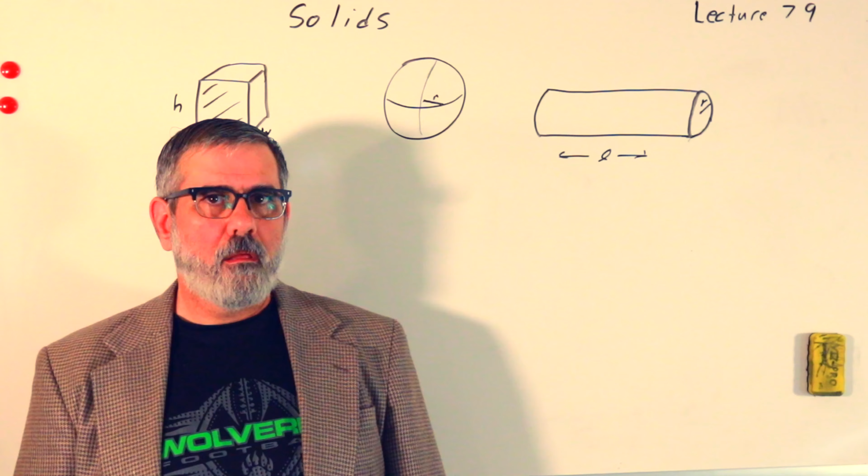Lecture 79. This lecture is on solids, so we're going to transition into talking about solids, liquids, and gases, and how we treat them in physics. We'll also put some thermodynamics in here as well, so it'll be kind of our first contact with thermodynamics.

But today we're going to talk about solids. Just keep in mind, you know the formal definitions of these things, right? Solids retain their shape. Liquids maintain the shape of the container in which they're contained. And gases tend to diffuse in every direction, so they're hard to contain. You can only contain them in an enclosed volume, and they will fill that uniformly, okay?

But what's the difference between, say, a solid and a liquid? Well, think about glass, right? Glass is kind of like a liquid. It's always kind of flowing. If we were to have some glass windows and wait a few hundred years, you'd see the glass would pile up towards the bottom because it's always flowing. It's in a flowing state.

If you think of the rocks in the Earth's mantle, where it's very hot and high pressure, these rocks behave like liquid over time. Granite, for example, which is what the continents sit on, is buoyant in the rock substrate in which it sits. It has a lower density, so it's kind of buoyed up in comparison to, I forget, what the ocean floor is made of. It slips my mind, I'm not a geologist. But anyways, so there's kind of...

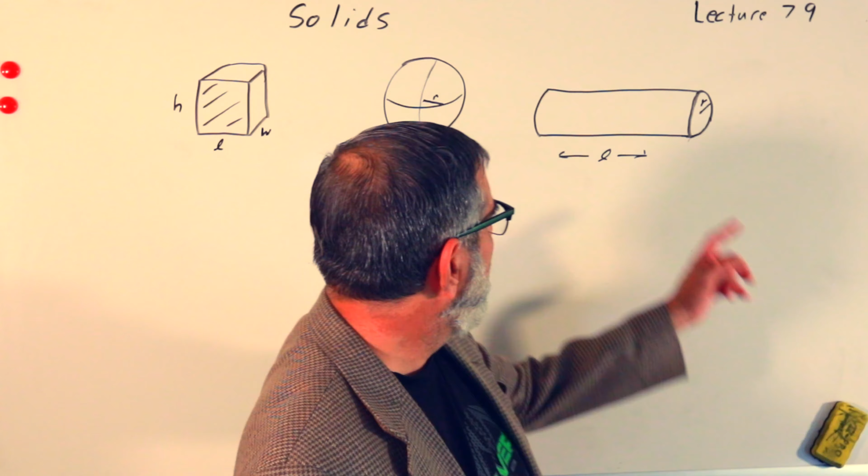But we're going to focus on solids, so we have to begin with some general metrics for solids. Here are a few different shaped solids. Solids have shapes—they can have any shape, but some common ones are cube-like shapes, sphere-like shapes, and cylinder-like shapes. As we work with this stuff today, we're going to need some formulas, like for volume.

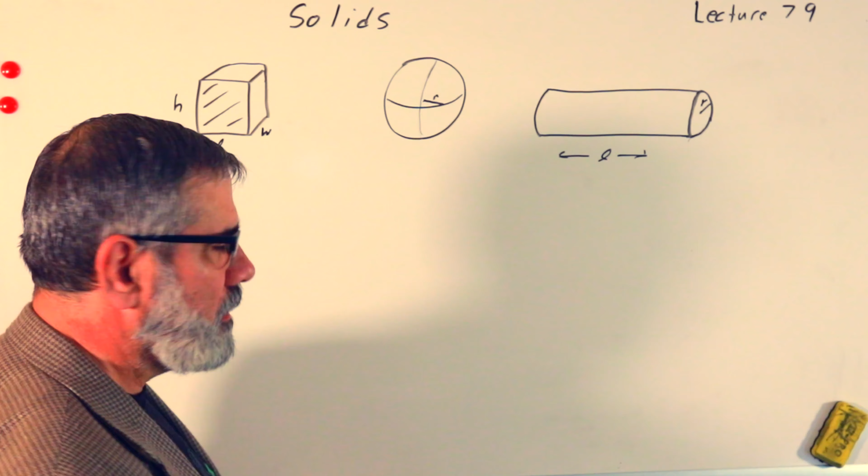So what's the volume of a cube? If this is the length, this is the width, and this is the height, what is the volume formula for a cube? Or what do they call it—I don't remember what they call the three-dimensional rectangle version. Rhomboid? I don't remember. But anyways, who knows the volume formula for this?

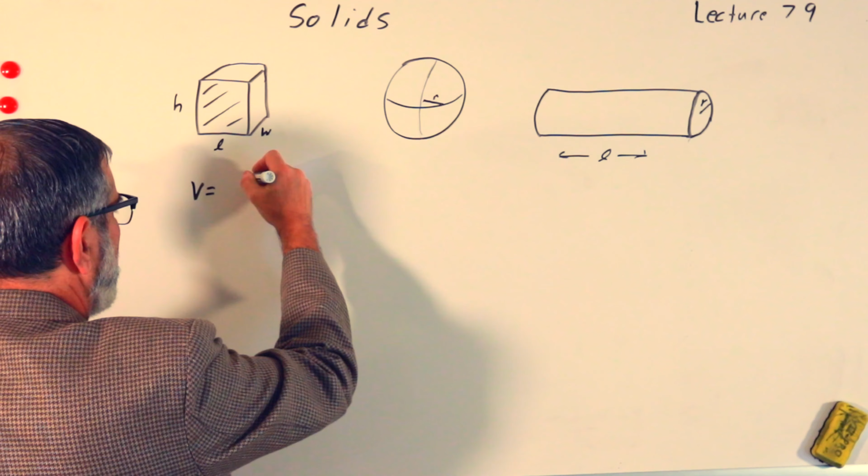H times L times W? Yeah, of course, it's exactly the product of these three dimensions—length times height times width. If it really was a cube and all three were the same length, you'd say it was L cubed.

But look at the face of the cube—that's an area. If we slice this cube, it's called a cross section. If you cut the cube so you have a face like that, its cross section is this square or rectangular cross section. So the cross-sectional area, CR for cross-section, in this case equals the height times the length.

What about this one? This is a sphere. What's the volume of a sphere? The formula pi r squared is actually the area. It turns out the volume of a sphere is 4/3 pi r cubed. It's trivial if you have calculus—you can integrate—but if you don't, I think it's best just to memorize.

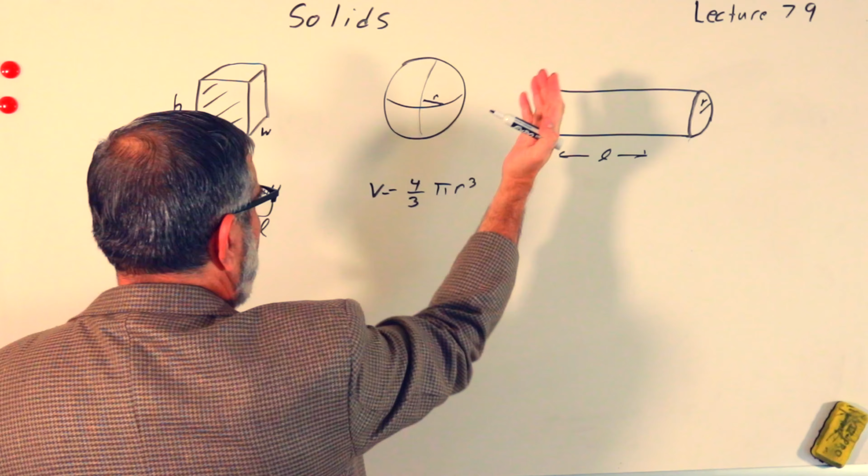I have to think about whether there's a non-calculus way to do it—there probably is. If I slice it right down the center, through the center point of the sphere, we get a cross-sectional area equal to pi r squared. If I don't slice through the center, the radius will be less—imagine slicing right at the edge, it's a much smaller radius. This distance here would be the radius of the cross section.

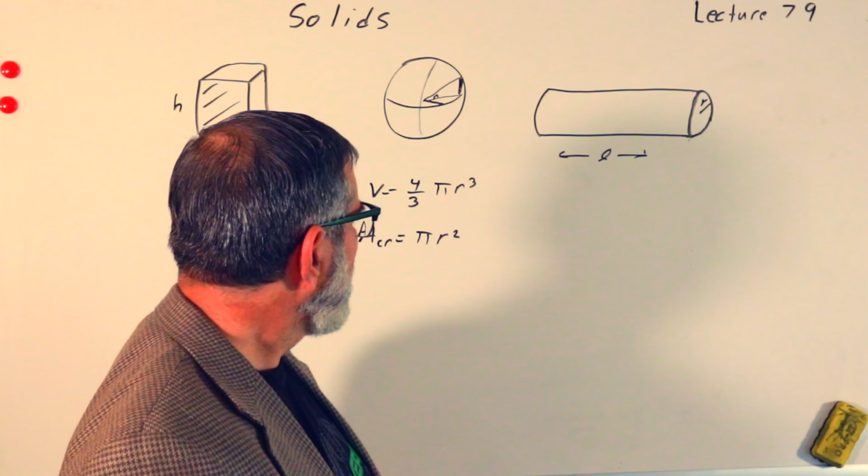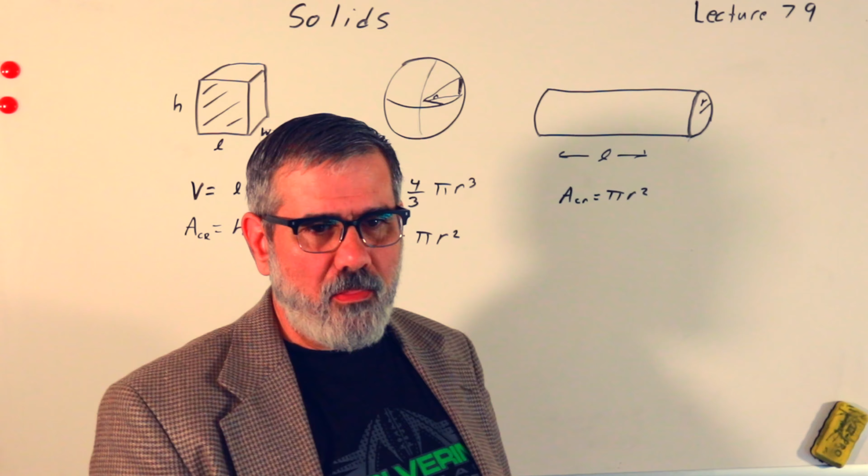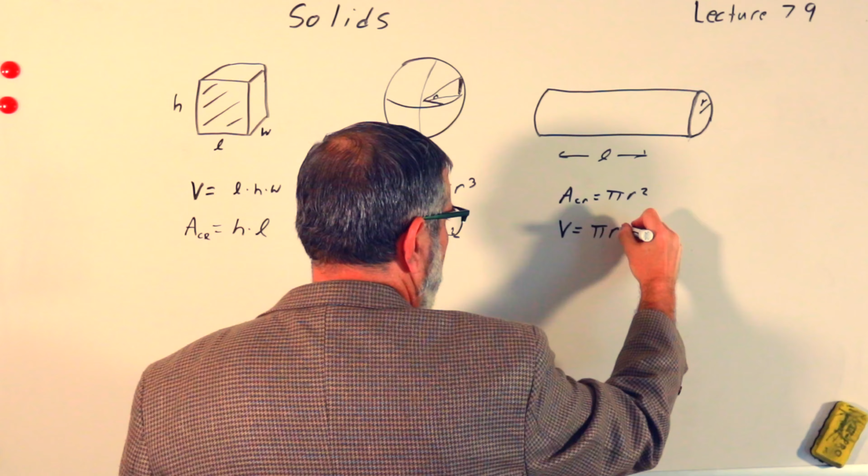What about the cylinder? I think it's easiest to start with the cross-sectional area. If I slice a piece off a cylinder like this, I get a circle as my cross-sectional area, so that's pi r squared. If you imagine creating a really large number of slices, infinitely thin but infinite in number, and add them all up from 0 to L, this gives the volume formula: pi r squared times L.

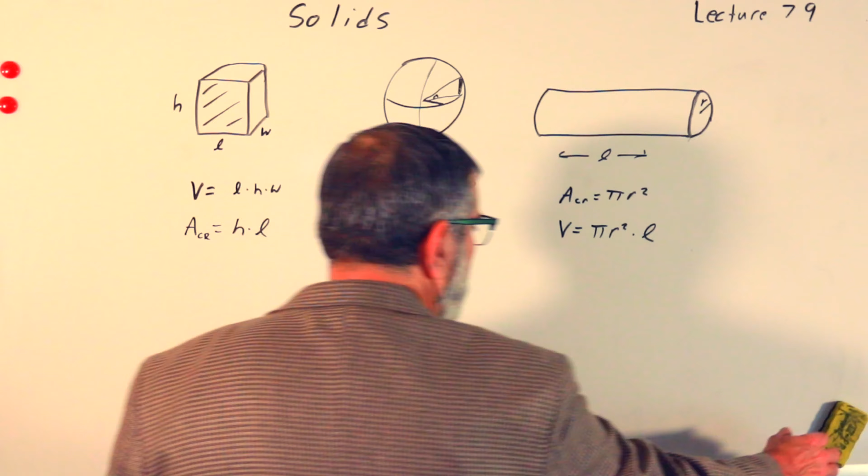Volume formulas are useful for what I'm about to show next: one of the basic measurements of a solid. Perhaps the most basic characteristic of a solid is its density—how much mass it has per unit volume. Usually we use rho for density, and it's equal to mass divided by volume.

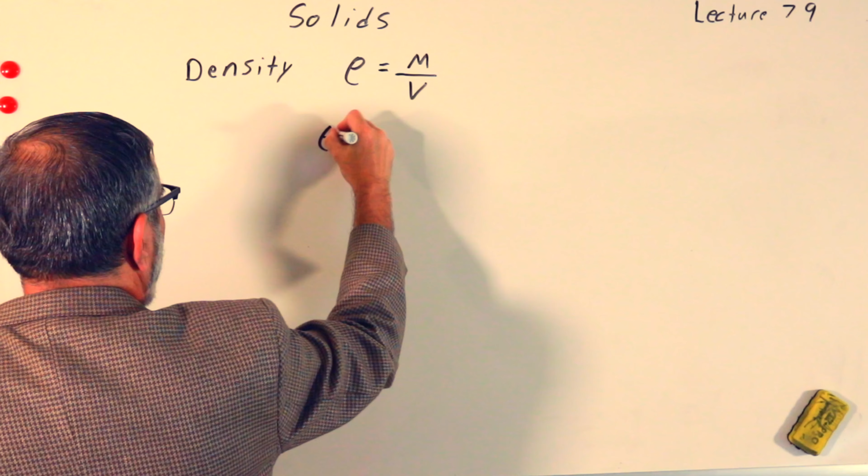Not too tricky. Let me give some examples. Even though it isn't a solid, the density of water, for comparison, is 1 gram per cubic centimeter, or in SI units, 1,000 kilograms per cubic meter. A cubic centimeter is a good reference for thinking about mass—remember, a centimeter is about the width of your pinky nail, so that gives you an idea how big this little cube would be.

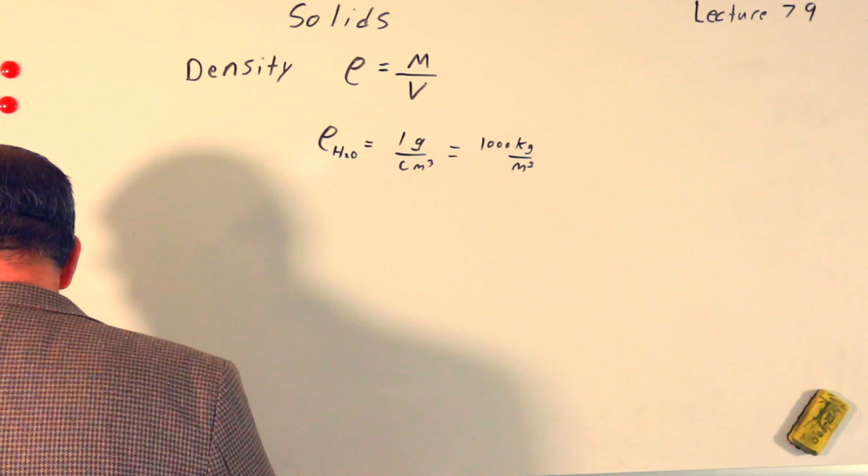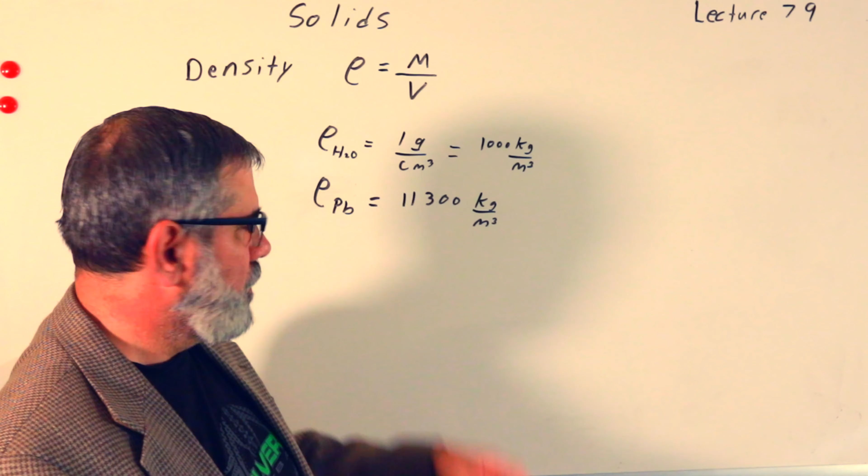What about something like lead? Lead is really, really dense—its density is 11,300 kilograms per cubic meter. What would that be in grams per cubic centimeter? It'd be 11.3 grams per cubic centimeter, just from how the units work out. I'll leave converting between volumetric units as an exercise for you to practice—it's not as trivial as you might think, it can surprise you a little.

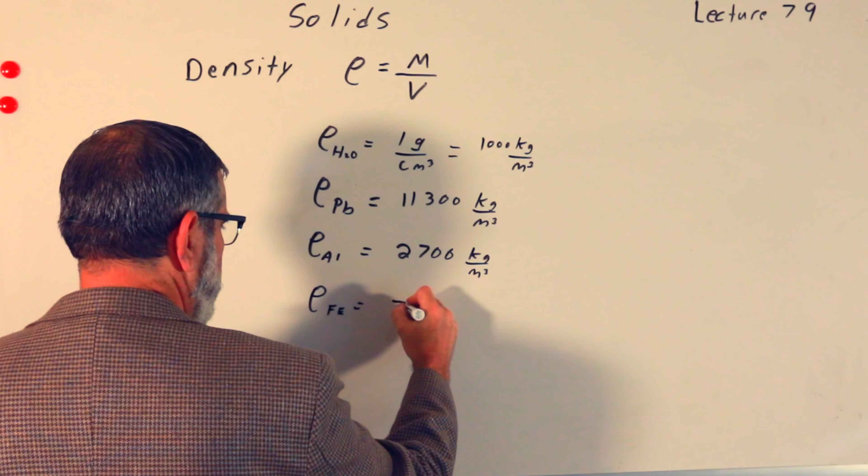Another metal, aluminum, has a density of 2,700 kilograms per cubic meter. And iron, which is very close to steel, is 7,960 kilograms per cubic meter—I think I wrote the number down wrong at first, it should be grams per centimeter cubed equivalent, 7.96.

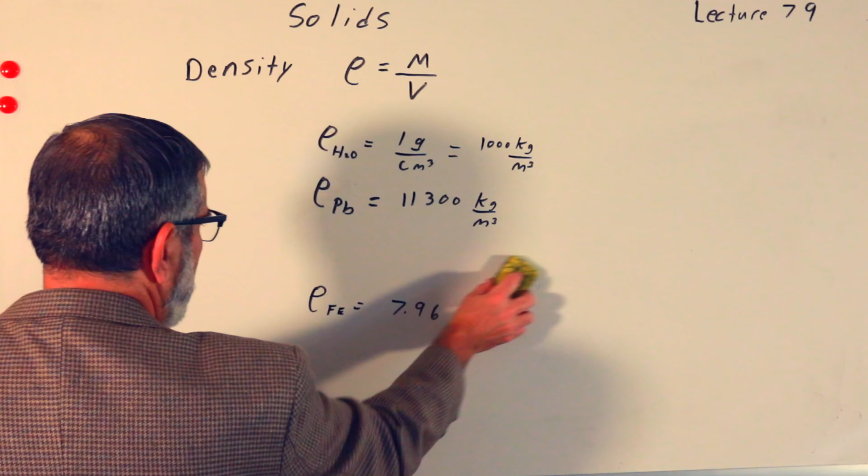Let's see how we'd apply a problem to this. Let's pick lead and keep its value up here. Let's ask: how big would a lead brick be if it had the following dimensions—10 centimeters long, 5 centimeters wide, and 5 centimeters high? The question is, how much does this brick weigh? How would we figure that out?

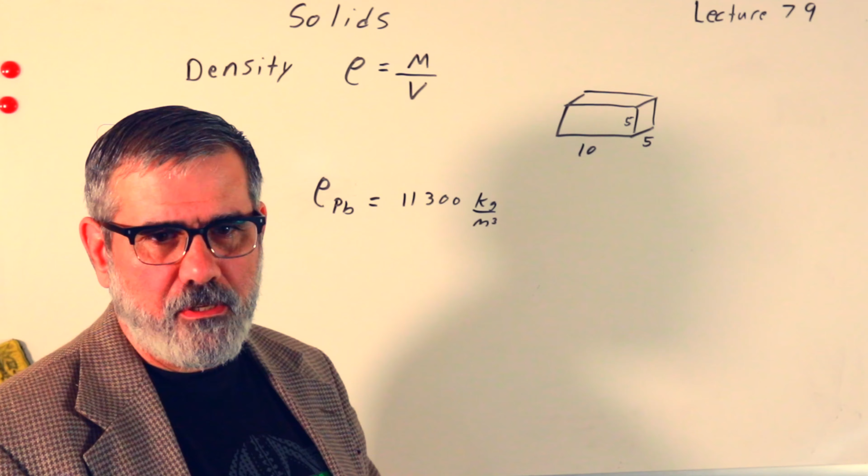We'd use the density formula. Since density equals mass divided by volume, and we want to know the mass, we solve for mass and write it as density times volume—pretty straightforward. We can plug this in: 11.3 grams per cubic centimeter, using centimeters here since that's what our dimensions are in.

So I've got 10 times 5 times 5 centimeters cubed. This is roughly... well, it's exactly 250. So it's 250 times 11. Everyone remember the rule for multiplying by 11? Let's call this 11, and we'll call this 250. You can see the centimeters cubed are going to cancel out, and I'll be given an answer in grams.

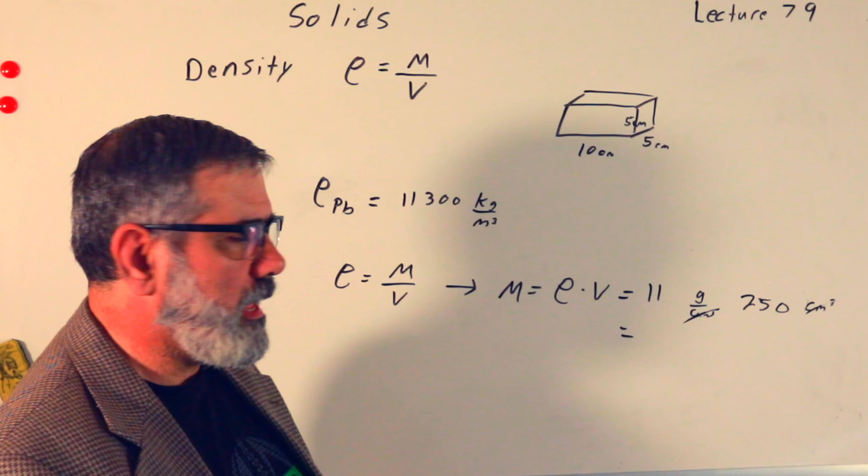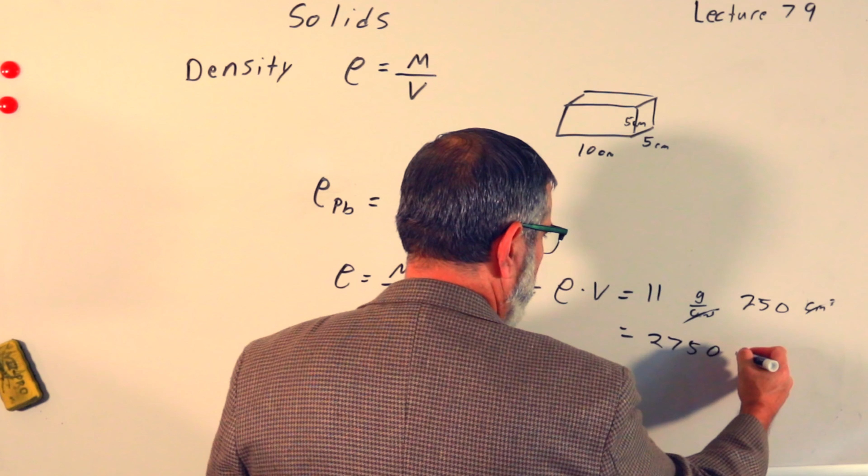Who can do 250 times 11? Anyone remember the trick? It's pretty easy actually. So, 2, 5 plus 2 is 7, 5 plus 0 is 5, and then the last digit, 2,750 is 11 times 250 grams. So 2,750 grams is the mass of that brick.

Stress and strain. This is kind of the meat of the course, or of the lesson.

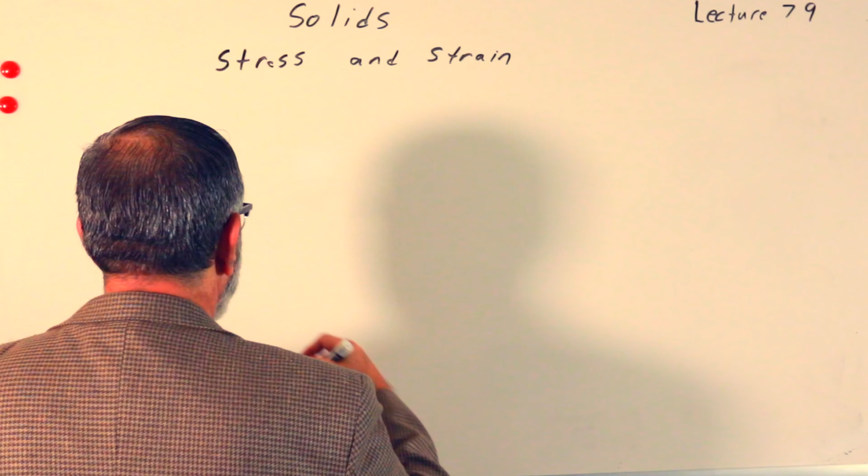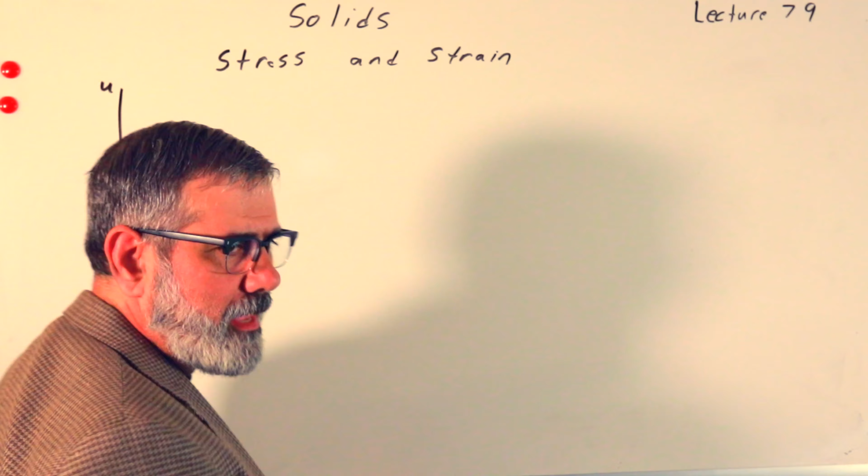So first, let me just say this: if we look at a solid, you know things are made of atoms. And if you look at what the potential energy surface looks like between a pair of atoms that are bonded to each other, like they might be in a solid, the potential energy surface looks something like this. Here's U, here is R. That's the interatomic or intermolecular separation distance, the distance between the atoms or molecules that make up the solid.

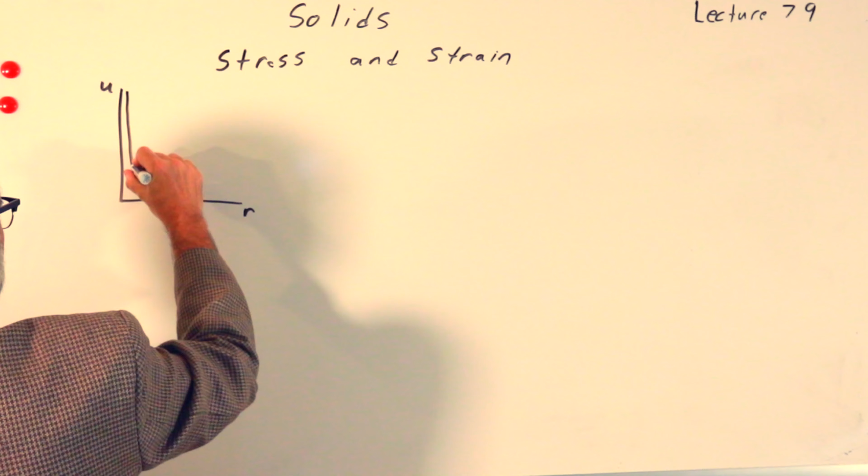That's what R is here. And it's going to look like this: very steep coming down, and then it's going to kind of trail off and asymptotically approach this value here.

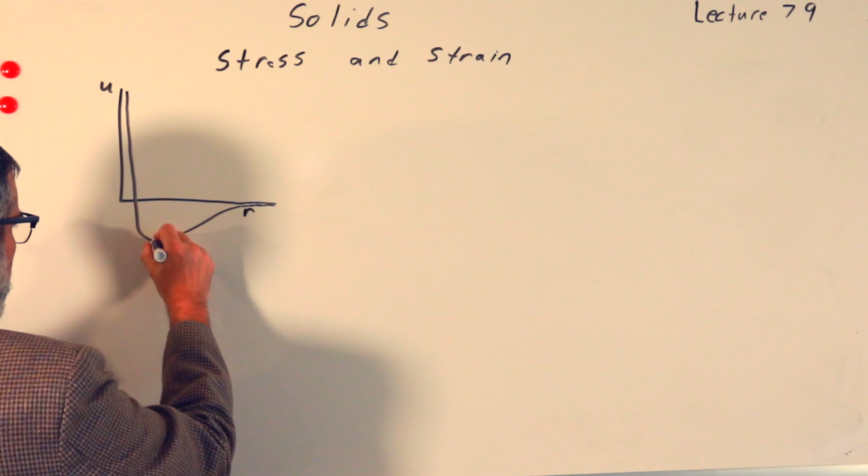The equilibrium position will be - you remember when we talked about potential energy surfaces, we said just imagine it's like a ditch, or... there's another word I'd like to use instead of ditch but I can't think of it - a well, maybe. It's in this well, and it's going to roll around until it reaches its equilibrium position here at the bottom. So that's its equilibrium position there.

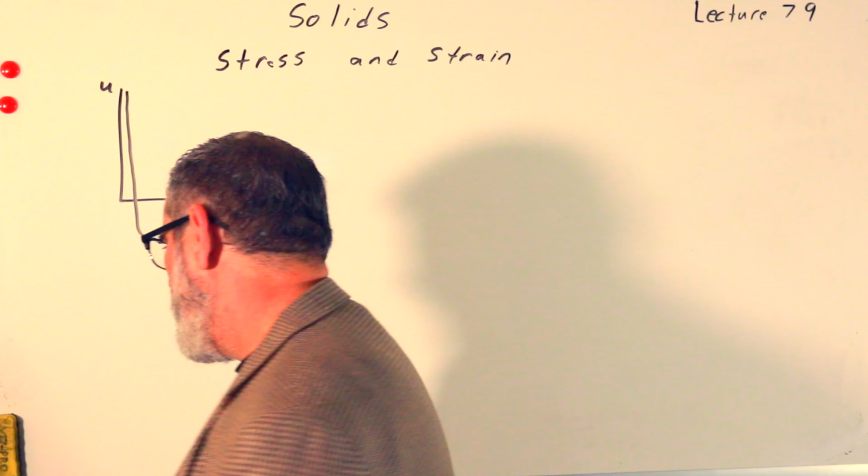And empirically, this comes into play through what's called the Lennard-Jones potential. You don't need to worry about that too much, but it's something of the form A over r to the 12th minus B over r to the 6th. This is this part of the curve here. The r to the 6th is this part of the curve here. It's empirically fit for a particular material.

They do some measurements in the lab, determine what the values of these coefficients are, and now they have some model they can use to calculate, simulate, whatever, something about this solid or liquid or gas. So this is kind of the repulsion, repel, attract, I guess you could say.

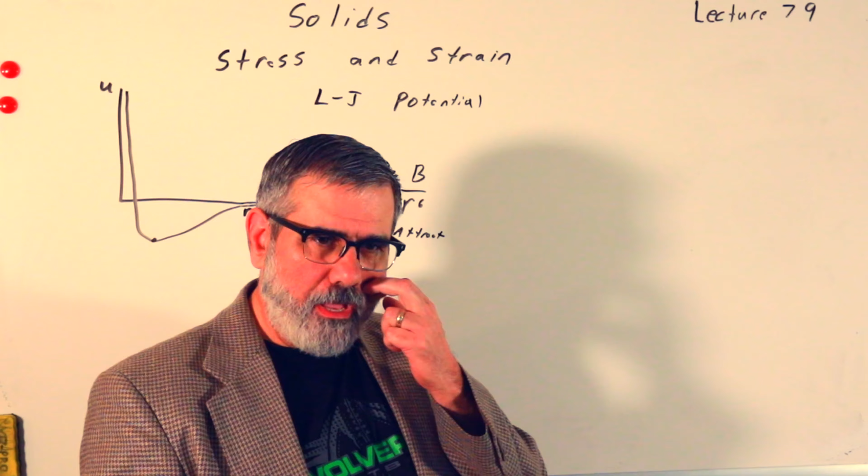So let's look at what happens when we try to pull these two atoms apart. If I pull on the material - if we just think of the atom and I pull on it - this is the potential that's pulling back. You can see it starts off kind of linear at first, and then it's going to start leveling off a bit here.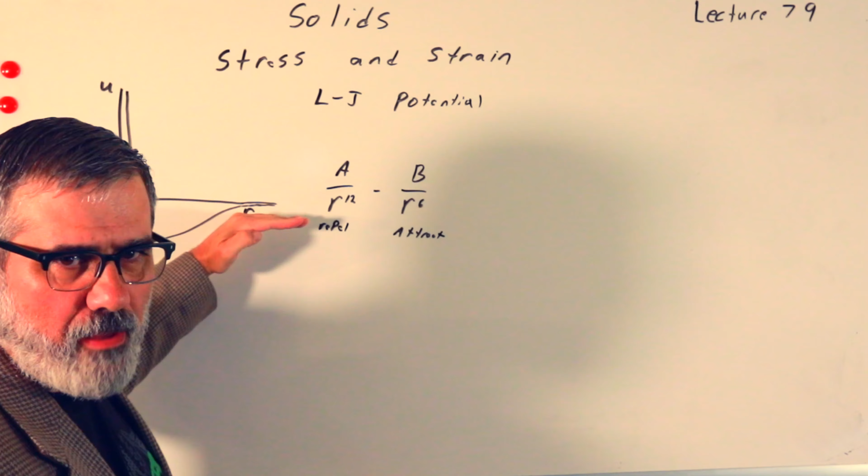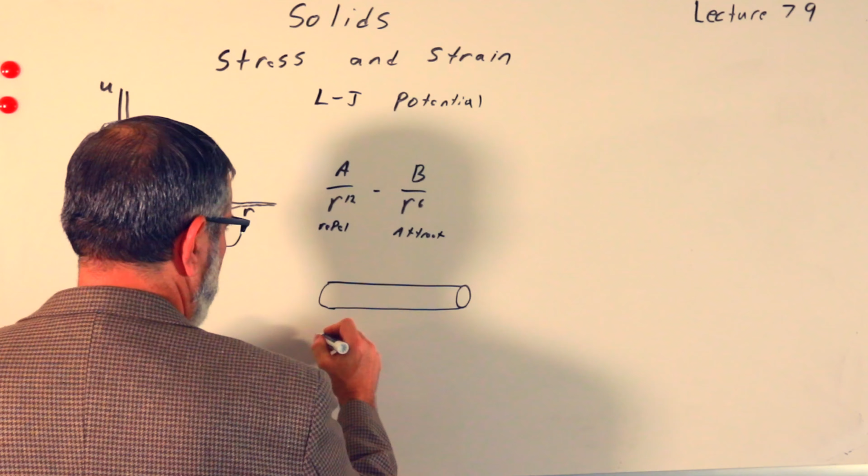But how do we think about that in terms of - we can't pull on individual atoms, we can pull on, say, a rod of material. So what if we had a rod of material like this? And let's consider just a section of it here, a little section of length L. And I'm going to apply a force, one on this end, one on this end.

These are called tensile forces. They're in opposite directions. The tensile stress is defined as delta F over A, where A is the cross-sectional area. If we think of this cross-sectional area, there's R, it's kind of a circular cross-section, in this case, for the rod.

So it's the applied force - the force that you apply - divided by the cross-sectional area. Now the strain, we'll call it tensile strain, is defined as delta L over L.

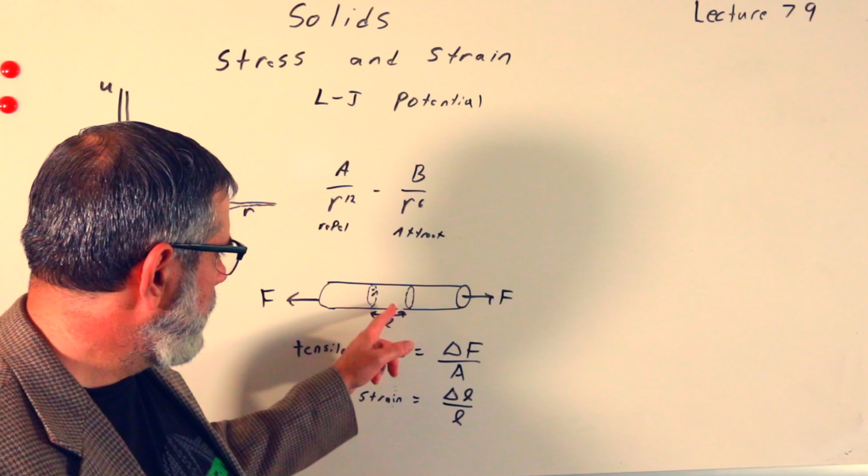So if I introduce a change in the force that I apply - I'm applying a force at length L, now I apply a little more force, it changes its length a little bit because it's stretching. And so the definition of the strain, that's kind of the material's response to the stress I've applied, is given by this formula: the change in the length of this little section divided by the length of that section.

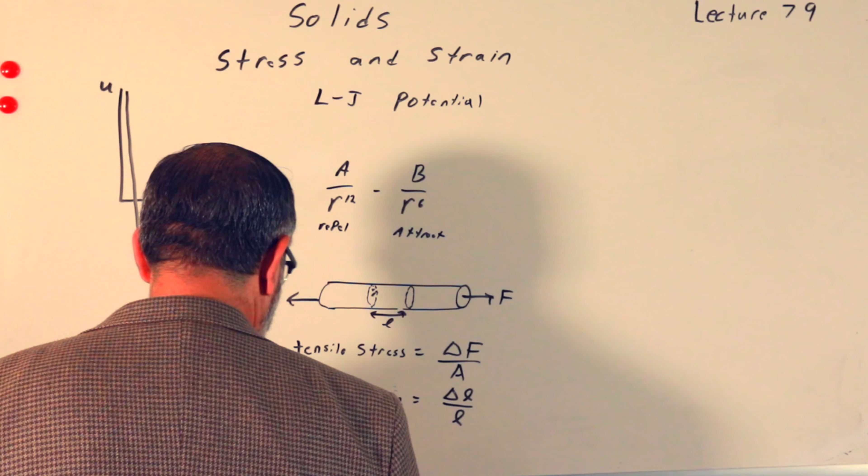Yeah, so if we were to look at, we need one more definition here. We can put these two things together in something called Young's modulus - uppercase Y for Young. It's just the stress divided by the strain. And that will have units of newtons per meter squared. It turns out to be the same units as you'd get for pressure, which is the force applied on some area.

I want to draw a curve to see what's going on here, just to show you for general solid materials. So I'm going to make this axis the stress axis, and this axis the strain axis, okay?

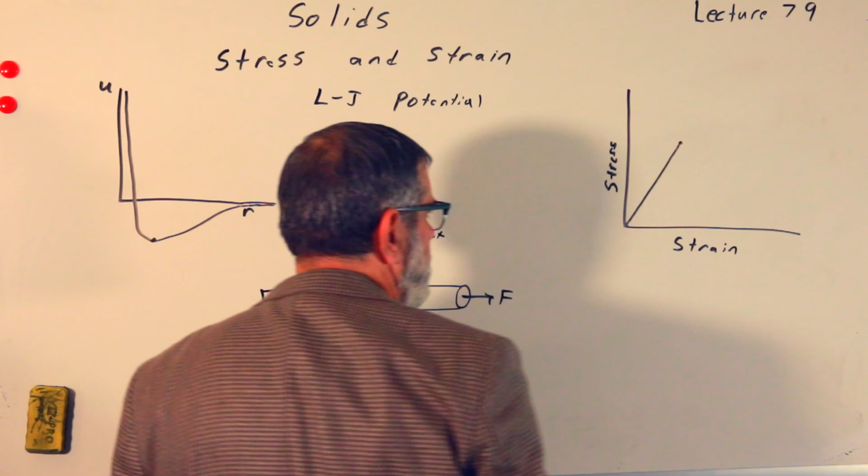As we increase the stress, it will stay linear for a while, up to a point. At some point, this we'll call the Hookean region, where Hooke's law applies. Do you remember Hooke's law? F is equal to minus kx, right?

The force is oppositely directed to the displacement, or delta x. If I create a delta x, it's going to have a force. This is called the spring constant. The springs involve more than just the tensile stress and strain, but the same idea applies. Hooke's law applies to steel rods as well.

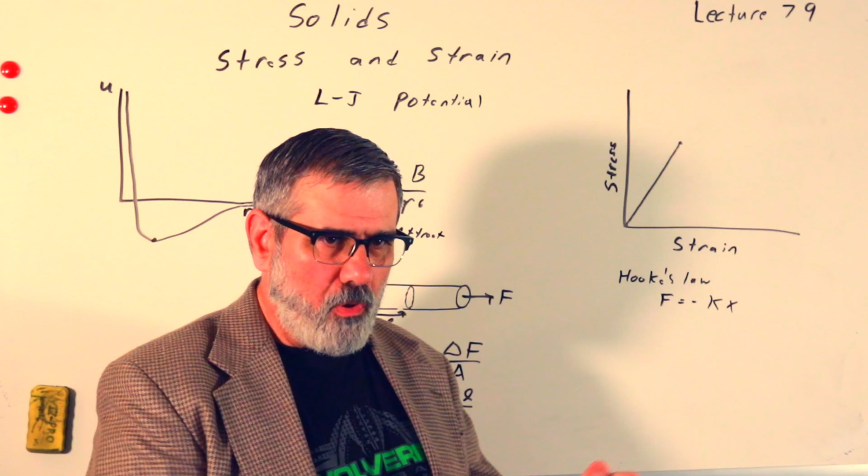You wouldn't think metals are elastic, but they are. We also call this elastic behavior - when you can pull on it, and if you release it, it'll return to its original shape, return to its original length. That's elastic behavior.

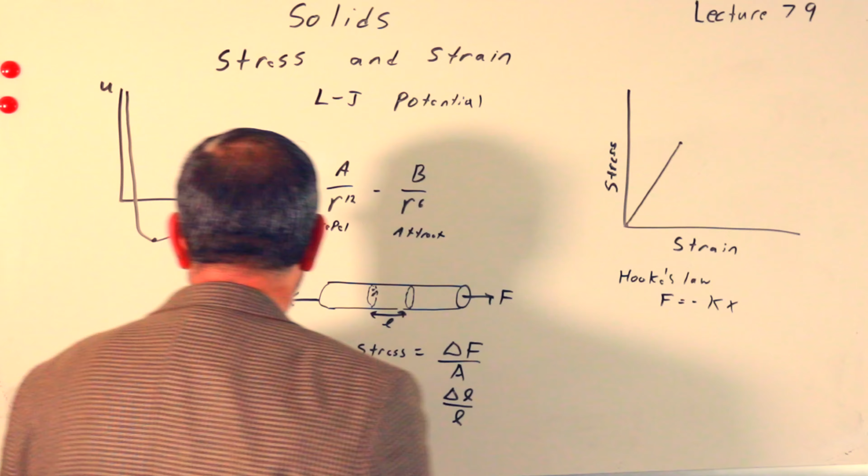But at some point, this starts to tail off. If we try to tie it back into the Lennard-Jones potential, you can see it's linear for a while, but then the slope starts to change on this potential energy surface. So you end up getting a slightly different kind of behavior here.

And finally, we can call this point here the elastic limit. After that, any further displacements that you make will not return back to their original length. So we call this the fracture point - that's where it breaks.

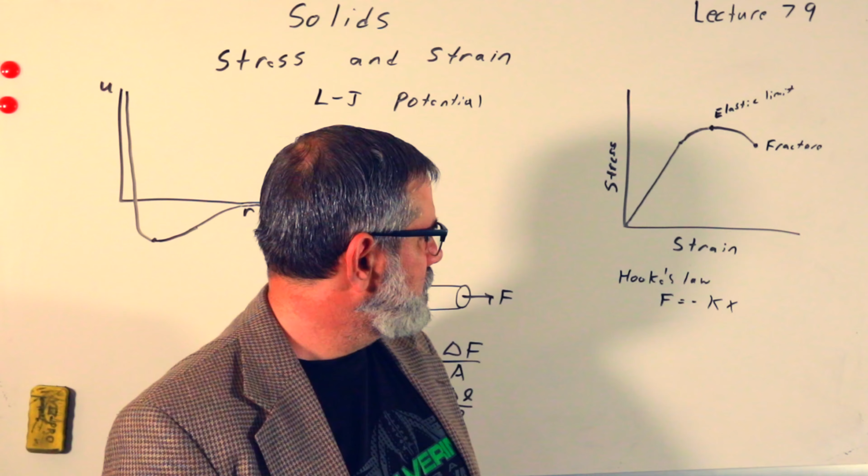So I start pulling on a steel rod. The stress will increase linearly, the strain will increase linearly with the stress. I always get the two confused - which one is the force term? You have to look: stress is the one that has the force applied. So you apply a stress, and the material has a strain - it's kind of its response.

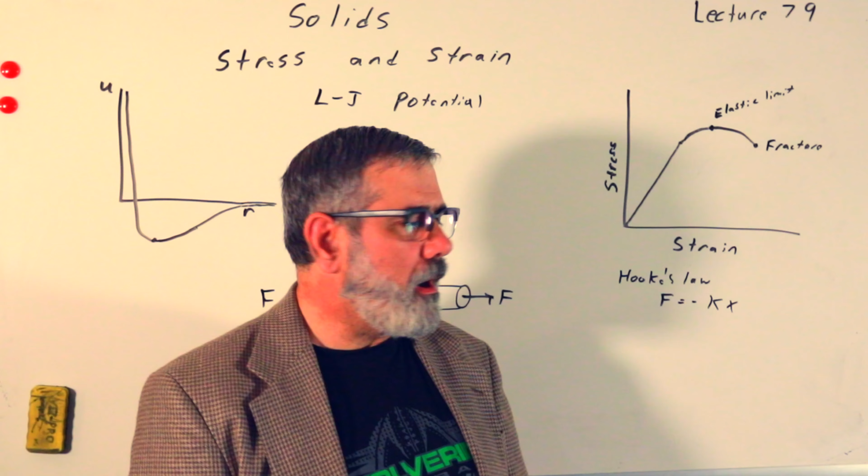So the strain will be linearly proportional to the stress up to this point, where now it's behaving nonlinear, but it's still elastic. Then we reach the elastic limit, and at any further stress beyond this point, the material cannot recover and go back to its original length or shape. So that's just a general characteristic of it.

The tensile stress is specifically just pulling like this. There are a couple others - I'll mention them casually here. One is called the shear stress. I have to draw a picture for you to see what that looks like.

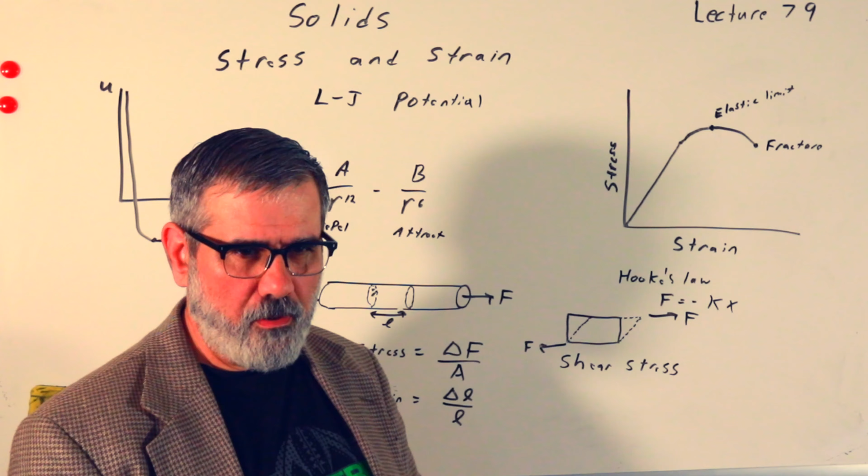It's where I apply a force in this direction and a force in this direction, but on the bottom - so I'm pulling at the top of this here, but I'm pulling from the bottom here, right? It's a shearing force. Do you understand the difference between this shearing force and this tensile force? Yeah, tensile stress, so this is a shear stress. It's causing the solid to deform like this.

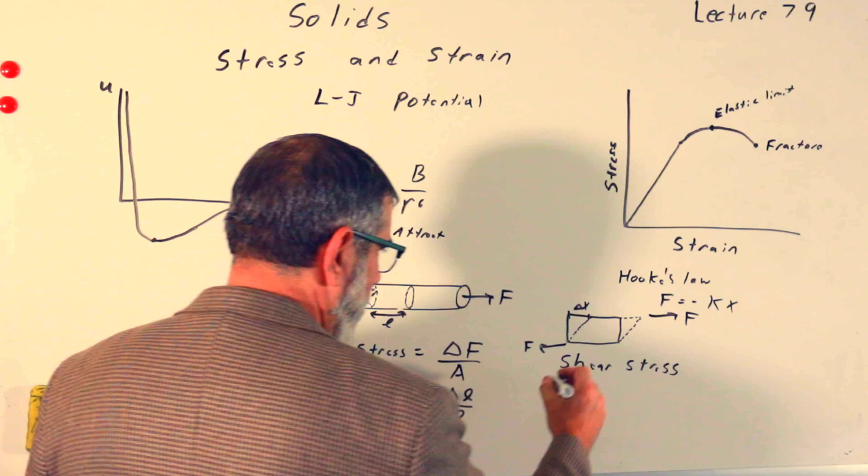So it started out in the solidly colored lines, and it ended up the dotted colored lines - that's where it ended up. This would be some little delta x that you get, this distance here. And we could call the length L of the section. But the shear stress would still be just this delta F, this time it's shear, over the area.

But the shear strain would be delta X over L - where actually L is going the wrong way, this should be L here. Kind of think of it as the distance that separates these two shearing forces. If L was 0, you've got yourself a tensile stress. If it's not 0, then we have a shear stress. Make sense? Yeah. And there's another one.

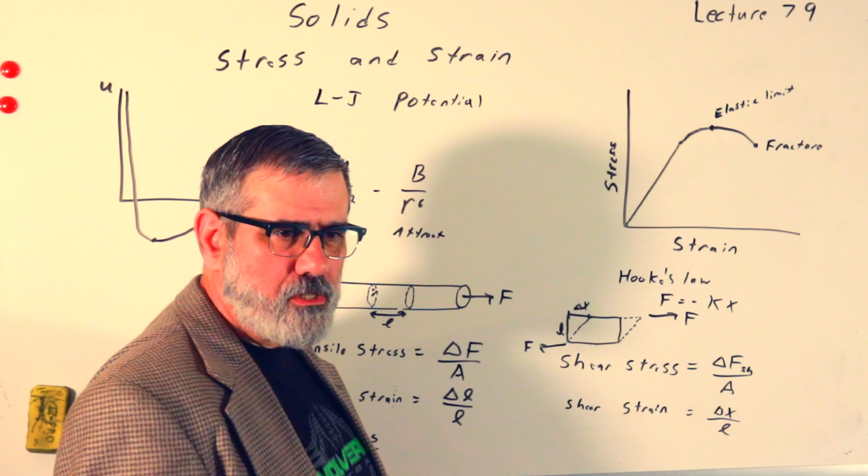It's called the bulk stress and the bulk strain, and that has to do with - you might take an object with a known volume and submerge it in water, so that as it goes deeper in the water, the pressure increases, pushing from all directions. The bulk modulus is similar to the Young's modulus, except there's a negative sign, because when you push in on things, it always gets smaller. But I'm not going to worry about that too much.

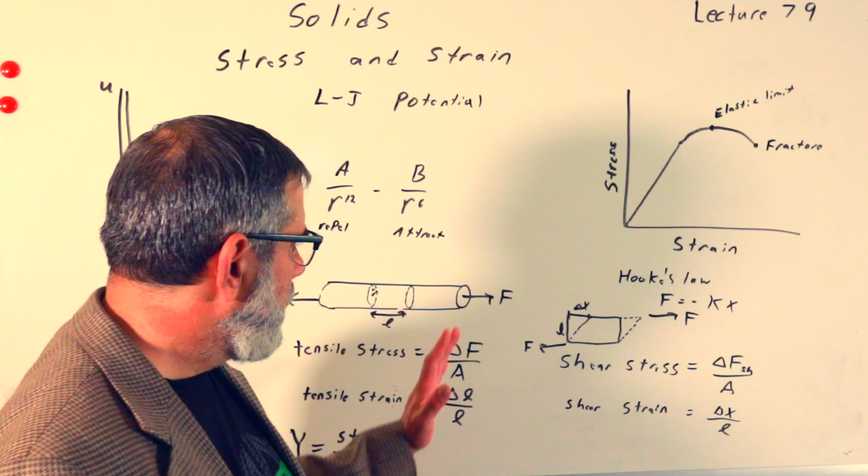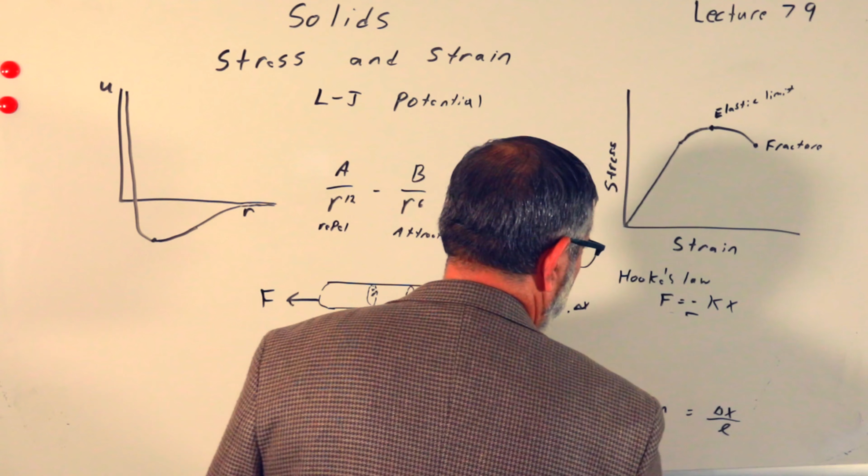But let's do a quick example on how to use this stuff in a problem. I'll put it over here, I think. Got some room here.

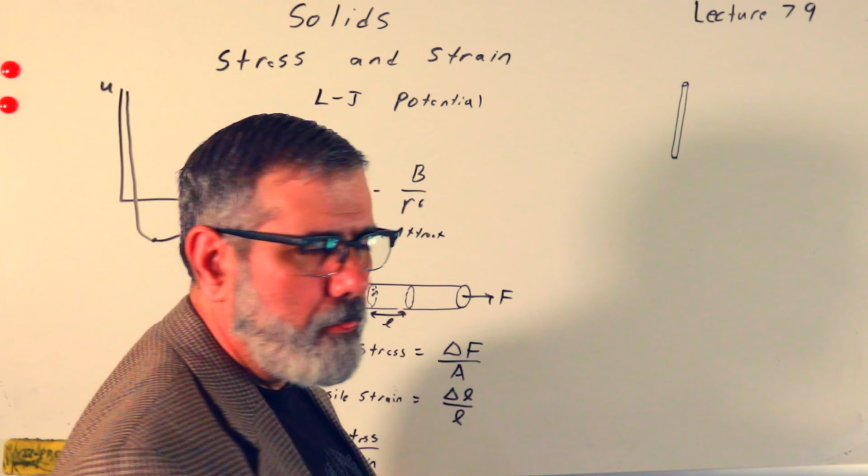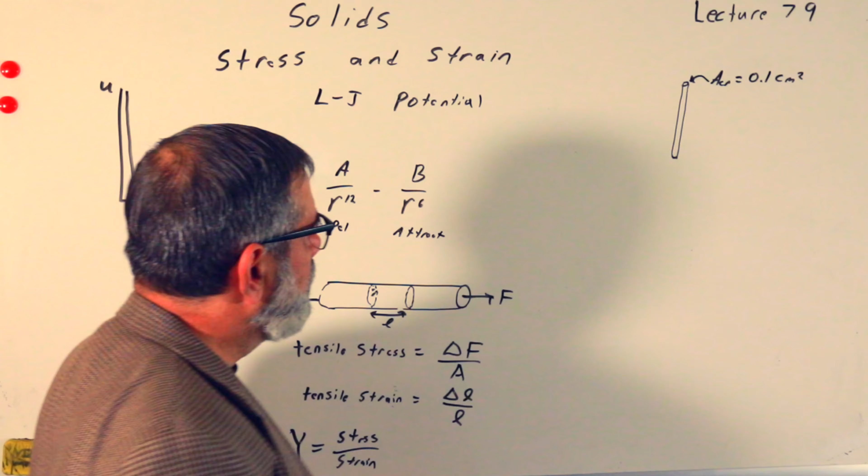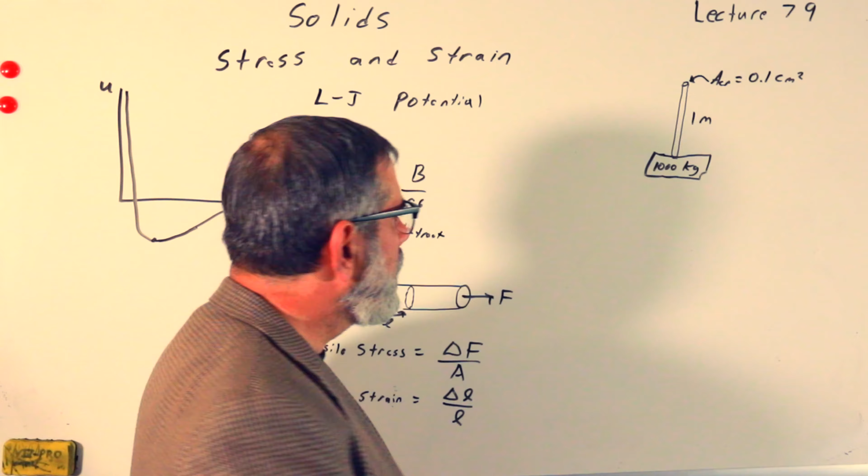So let's imagine that we have a little steel cable. The cross-sectional area, I'll call it A cross, is 0.1 centimeters squared. And I'm going to suspend a load, it doesn't really matter what the shape of the load is, of 1,000 kilograms from this cable. How long do I want the cable to be? I guess a meter long. You understand what's going on here? So I want to figure out how much that steel cable is going to stretch when I put this 1,000 kilogram load on it.

Let's convert this area into meters squared for convenience, and you'll get to see how to do these kind of conversions. So I want to take 0.1 centimeters squared times something to get meters squared divided by centimeters squared. How many centimeters are there in a meter? There's 100. But I don't need meters to centimeters, I need meters squared to centimeters squared, so we have to square this whole thing. So it's 0.1 times 1 times 10 to the minus 2 squared would be minus 4. And 0.1 times 1 times 10 to the minus 4 gives us one more: 1 times 10 to the minus 5. And that's meters squared, just to get it in SI units.

So what is the force here? What's the mass? 1,000 kilograms times the acceleration due to gravity, 10 meters per second squared. So that's going to be 10,000 newtons, which we'll write as 1 times 10 to the 4 newtons. It's 10,000 newtons, that's the force.

I'm missing one very crucial piece of information. This is steel, and I need the Young's modulus for that. So the Young's modulus for steel is 1 times 10 to the 11 newtons per meter squared. Is that right? Oh sorry, there's a 2, it's 2 times 10. Not a huge difference, but that's fine: 2 times 10 to the 11th newtons per meter squared.

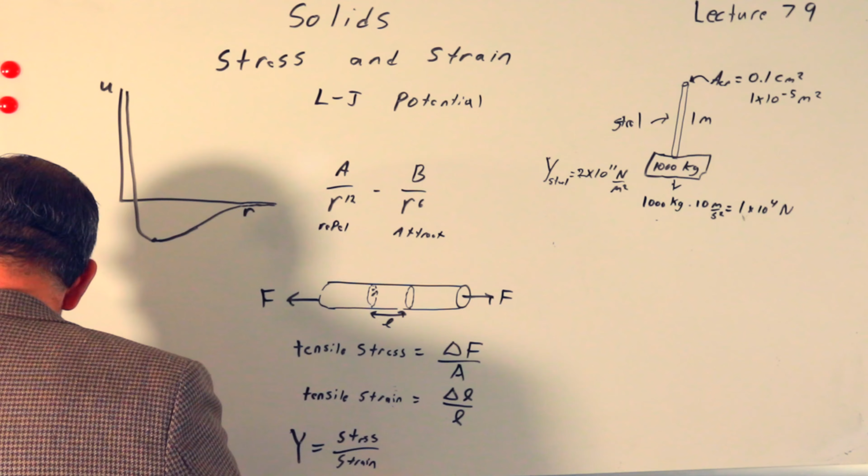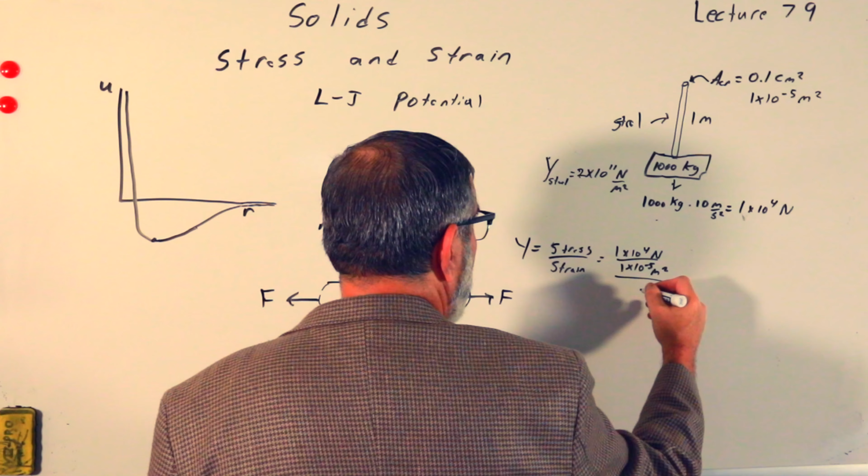So stress over strain is Young's modulus. Stress over strain, and that's the stress: 1 times 10 to the 4 newtons divided by 1 times 10 to the minus 5 meters squared. What is this going to reduce to? Well this is divided by the strain, which is the delta L over 1 meter, so divided by 1. So we have 10 to the 4th divided by 10 to the minus 5. What does that give us? 1 times 10 to the 9th, newtons per meter squared over delta L.

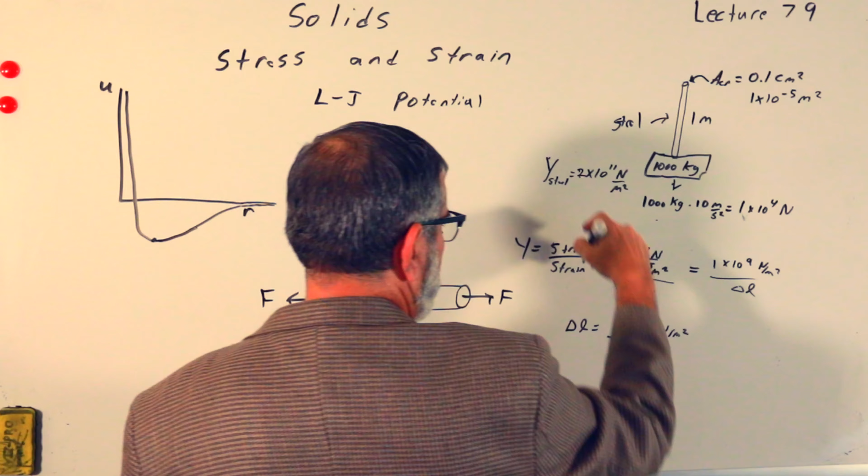Let's now solve for delta L. We'll say delta L is equal to this 1 times 10 to the 9 newtons per meter squared divided by Young's modulus, which is 2 times 10 to the 11th newtons per meter squared. The units are of course going to cancel because a change in length... oh, this is really delta L over L, I guess, my bad, so it's the ratio of that. Yeah, I said that L was 1 but I didn't put the units in, but anyway, we'll just do it like that.

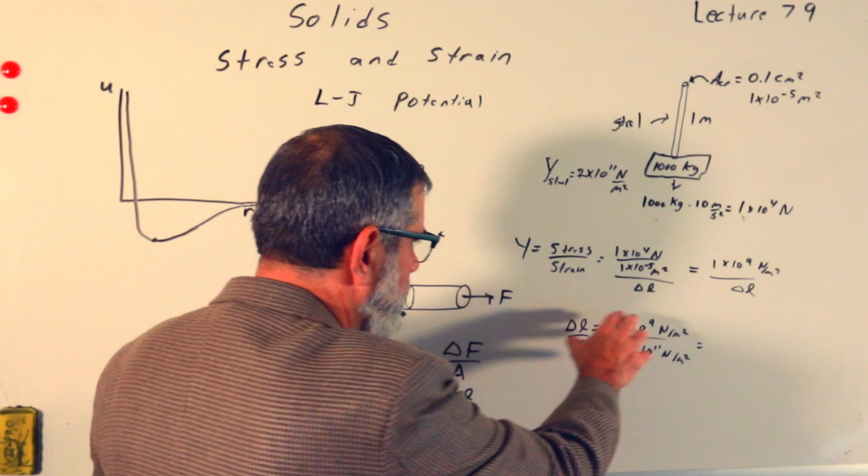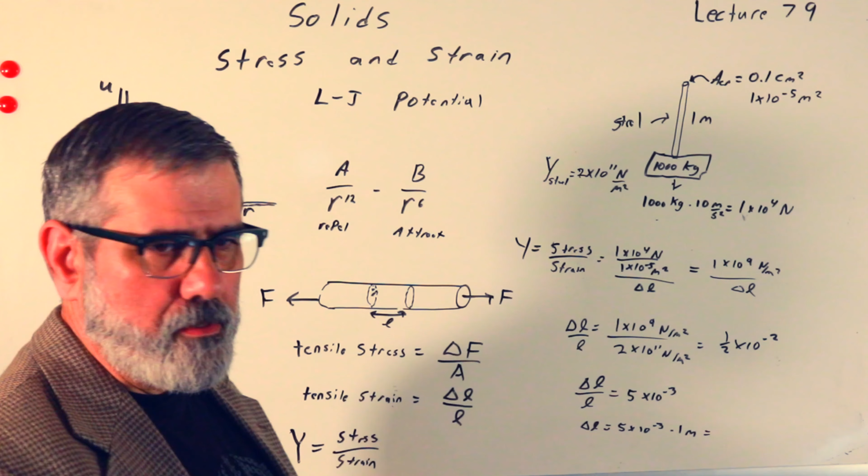We'll have delta L over L is equal to 1 times 10 to the 9th divided by 2 times 10 to the 11th. It's going to be 1/2 times 10 to the minus 2, so delta L over L is 5 times 10 to the minus 3. So if L was 1 meter, then 5 times 10 to the minus 3 meters is 5 millimeters. So 5 millimeters is the amount that this steel cable will stretch when we put a 1,000 kilogram load on it. And that's how you calculate that.

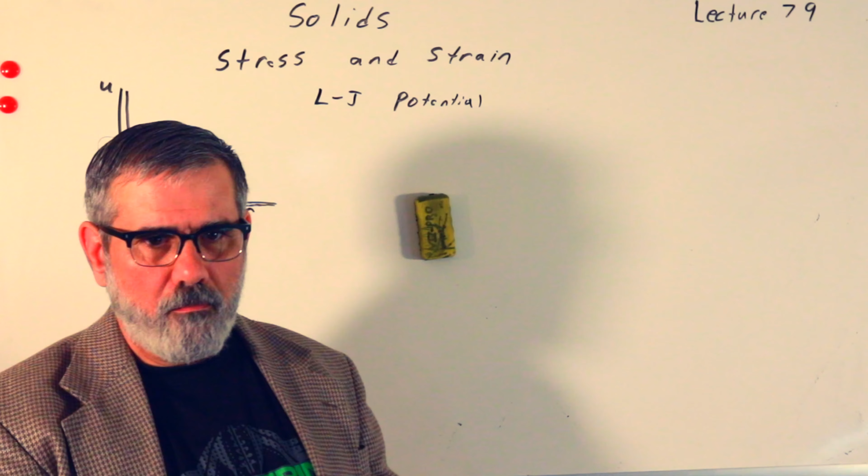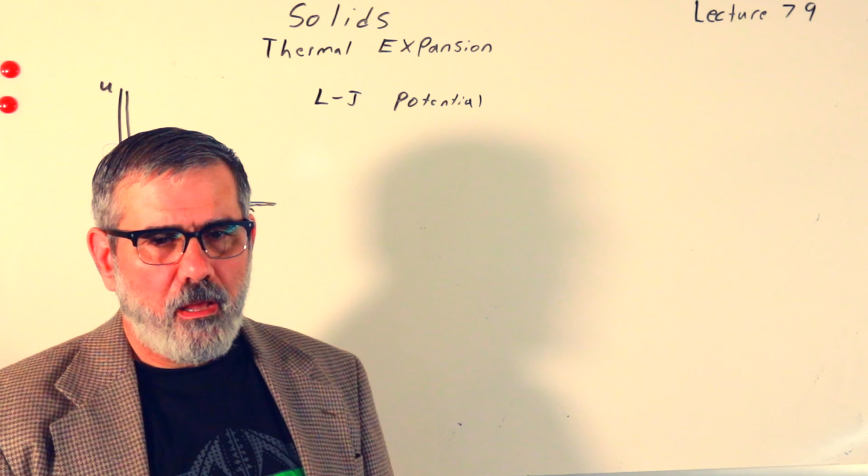All right, there's one last thing I want to talk about. So stress is one way to lengthen, say, a steel rod. Another way to do it is to add heat to it, this is called thermal expansion. Thermal expansion is thermodynamics this time, whereas stress and strain is purely mechanical. Thermal expansion is thermodynamic in nature, so we're going to make reference to concepts we haven't defined yet, like temperature and heat. We'll talk about heat a little bit in this lecture, but temperature as well, and we'll use the Kelvin scale, which has the same gradation as the Celsius scale. You just have to add 273, or subtract 273 from it to get it in Celsius.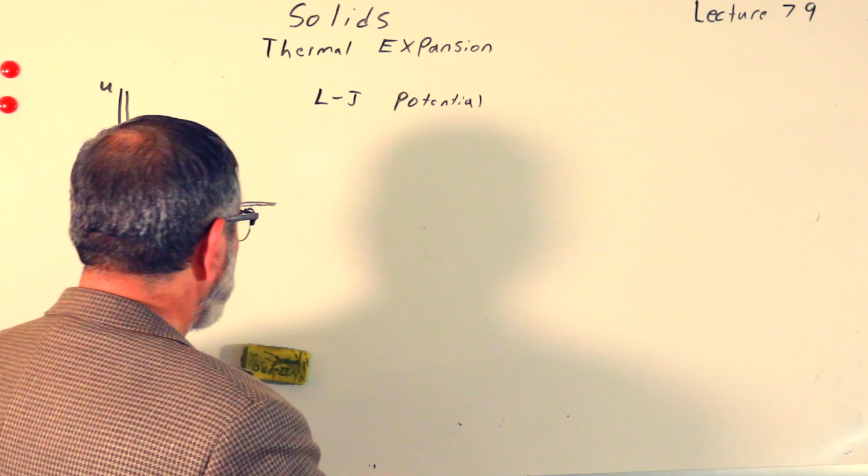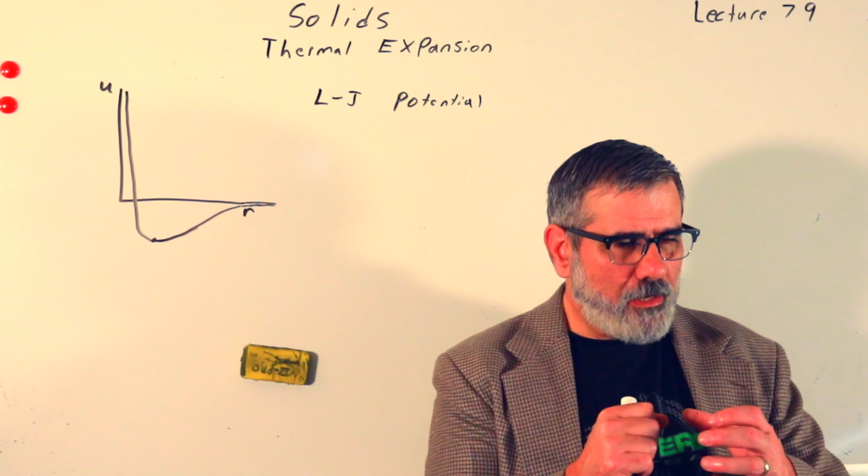So what is the idea behind thermal expansion? When you put heat into a solid or any matter, it causes the atoms and molecules to jiggle around. Now solids, the atoms and molecules must somehow be confined. There's a structure there, they bond together, and they're kind of semi-rigid, not moving around like in a liquid, where molecules are bumping into each other but not stuck to each other.

In a solid, the molecules and atoms are stuck to each other and somewhat rigid. But if you put heat into it, it's going to cause these atoms and molecules to jostle around, they're going to vibrate a little bit.

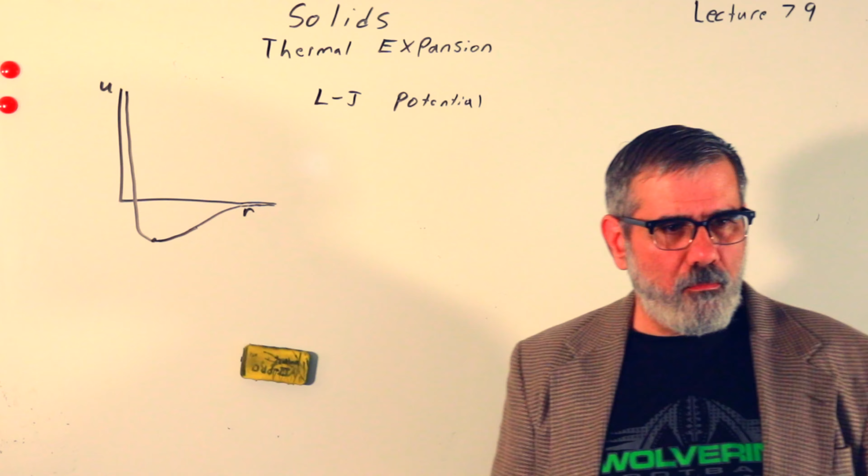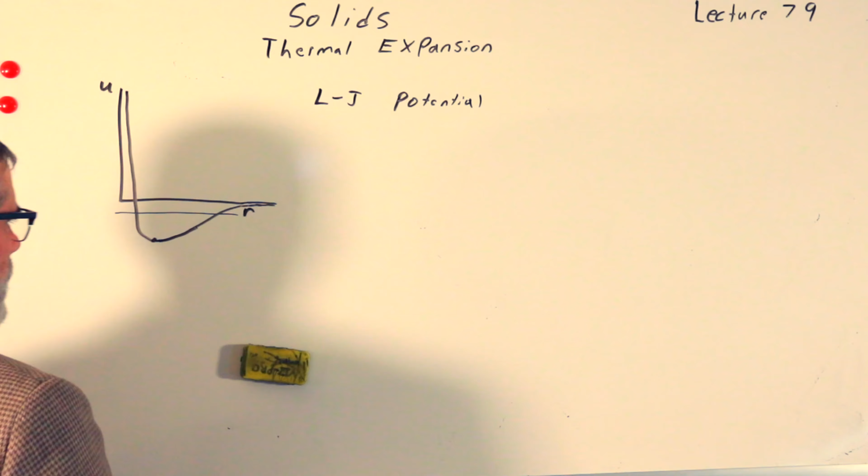Now, this potential I wrote up here earlier, the Lennard-Jones potential, you'll notice it's very asymmetric. So if I give it some more energy by dumping heat in, let's say I bring the energy up to this level, you can see it's going to oscillate back and forth. Remember how we talked about thinking of these potential energy surfaces as marbles rolling in wells? Well, this is not a symmetrical well.

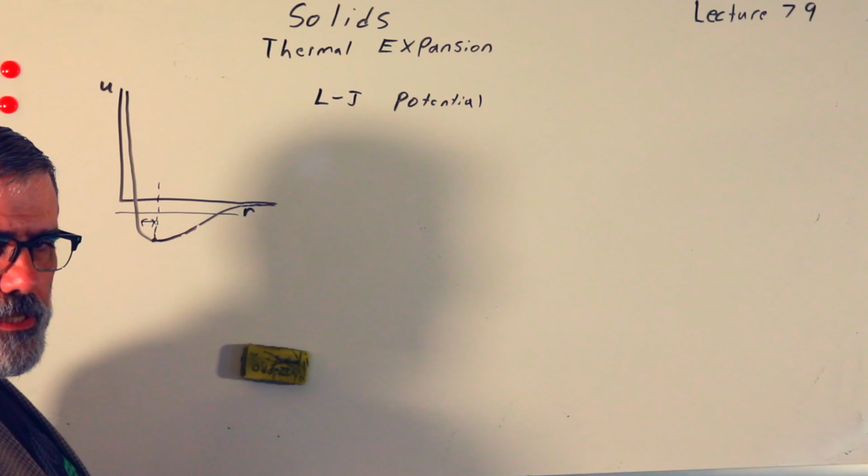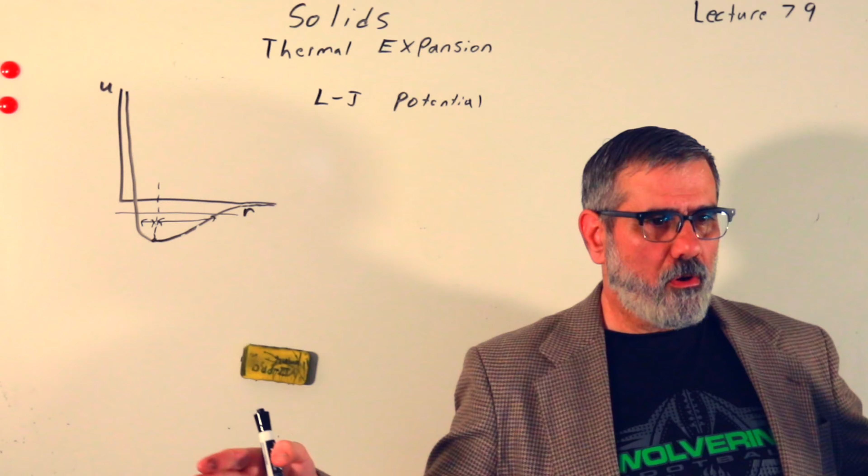If I mark out this equilibrium point, you can see that the motion to the left of this equilibrium point is much smaller than the motion to the right of it. So when you put energy into a solid, it tends to make it get longer. There's nothing magical about this, it's very empirical.

So as T goes up, delta L goes up. We could write that delta T, the change in temperature, times the coefficient of thermal expansion, will be equal to delta L over L. So the ratio of the change in length to its original length is given by the change in temperature times this thermal expansion coefficient. If you want to know how much expansion takes place, you solve for delta L: L times alpha times delta T, and you can figure that out.

For example, for steel, alpha is about 11 times 10 to the minus 6, 1 over kelvins. Kelvins is a unit of temperature. For comparison, the thermal expansion of glass - alpha for glass is 9 times 10 to the minus 6, 1 over kelvins.

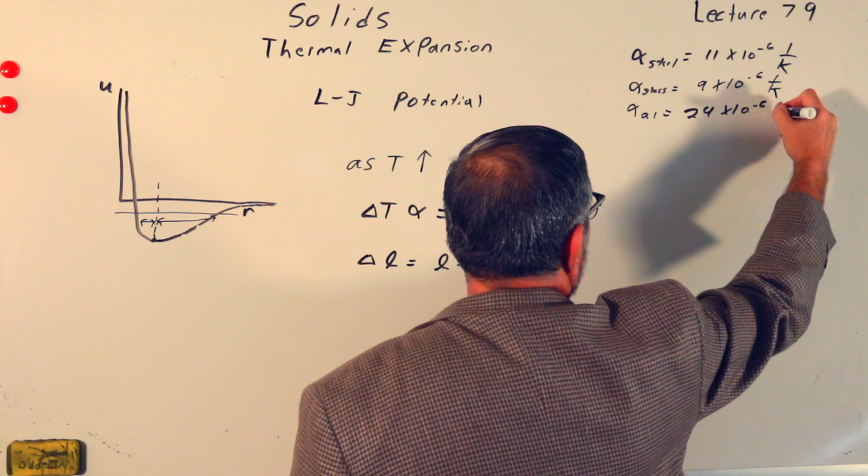And then maybe one more, aluminum: 24 times 10 to the minus 6, 1 over kelvins. So which one of these is going to expand more when I heat it - aluminum, glass, or steel? The expansion is proportional to the coefficient of thermal expansion, and aluminum has the largest one, so aluminum will change the most when you heat it up.

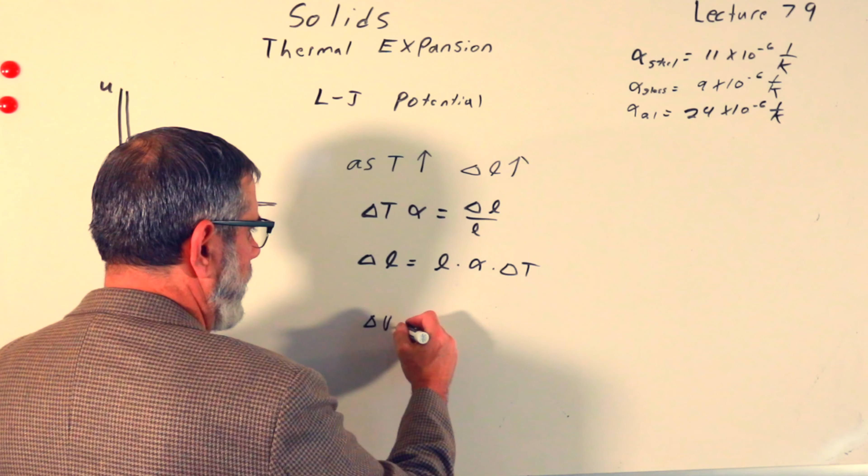Interesting thing - I'm not going to demonstrate it, but it's not hard to show, I'll leave it as an exercise - that the coefficient of thermal expansion for a volume, since it expands in every direction, is approximately, for small temperature changes, 3 times the thermal expansion coefficient. So delta V over V naught delta T is equal to 3 alpha, the thermal expansion coefficient.

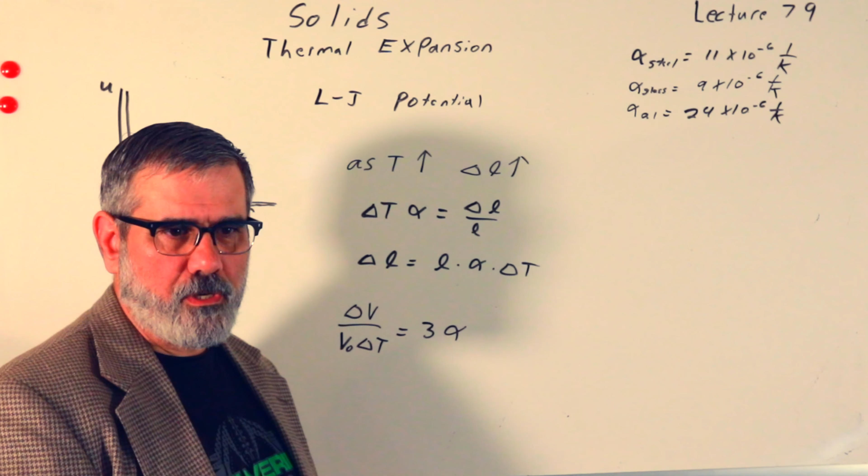So instead of just using a factor of 1 alpha, you'd use 3 alpha for a volume change. And it's not that hard to show.

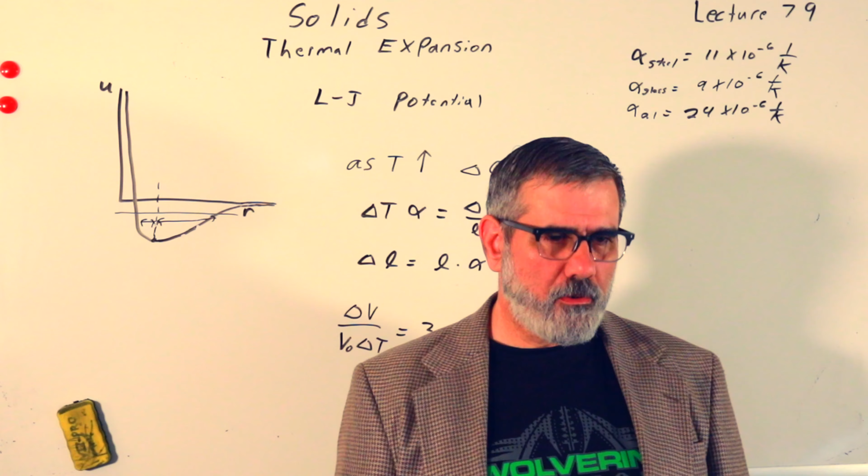I think that's all I wanted to say about solids. Next time we'll talk about liquids, which are fun because you get to talk about buoyancy and stuff, and then gases - probably a couple of gas lectures because we need to do the thermodynamics in gases a little more involved, so there's more to say. There's plenty to say about solids too, but solid state physics usually requires more background material than we have at our disposal. We have the idea of potential energy surfaces, so we can think about it to a degree, but the way we explore solid state physics is using interaction with radiation of various types, whether it be light or X-rays. We haven't really talked about light yet, so we can't go into too much detail on that.

Scattering, essentially. Any questions that you have? No? Okay, well, I think that's it.